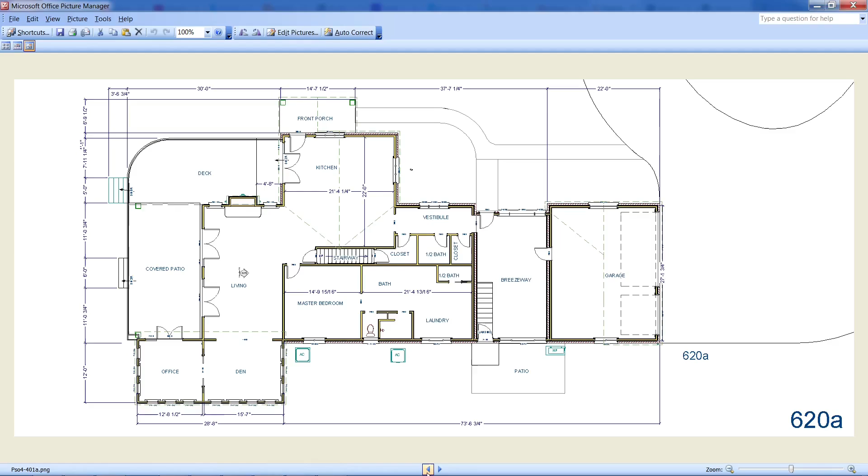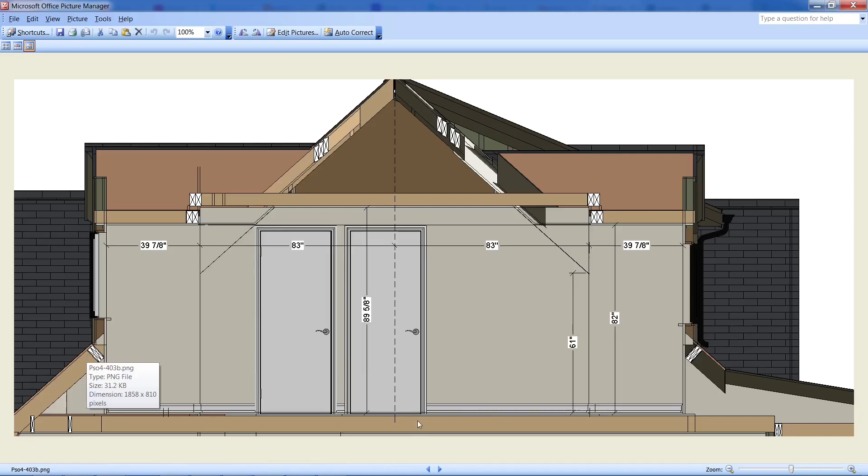I don't know what this 39 7/8 dimension actually is, the depth of those dormers. Those were based on shingle coursing outside, but it should be within a couple inches. Later on, I do have to raise this roof an inch or two to make everything work on the first floor, and you'll see that in a minute. But that's what I ended up with then. It was something that's in agreement with what you had said, the 166 across this dimension here. And so that's what I ended up with on the second floor for now at 623A.

And then I came down to work on this fireplace and went through everything that I'm going to show you in this film. But I did return briefly after I was done to see how the information I had put together would apply to some other fireplaces. Because going in, I just searched 42-inch fireplace and started with really the first result, which, as it turns out, is one of the less elaborate models. It's less big, etc. So you can go larger, because before I made this film, I went back and looked at these, and obviously there are a million manufacturers.

But because I had used a Majestic, the one I used was probably this Royalton. It was called the BE42 in any event, and it's one of the smaller models. All of them were 42-inch, but in terms of the viewing area, height and width, this was one of the smaller ones. It's 42 inches from here to there, the one that I've used for this design. And it requires a little more depth this way than what we had been showing. It requires 21.5 inches on depth. You can go larger than that pretty easily, and we'll be able to accommodate it. That looks pretty simple, so that might be the one I worked with.

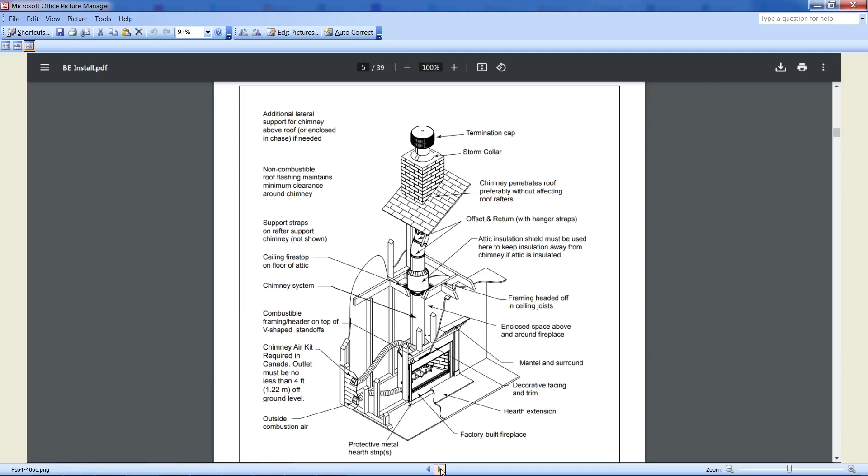But I wanted to see how high I have to make this chimney, and as I suspected, they really want it above the peak of the roof, particularly for where you're located. And there were different things to help with your airflow to make sure this thing will burn the wood. We have 42 out here, but they needed an extra 8 inches because of this bend.

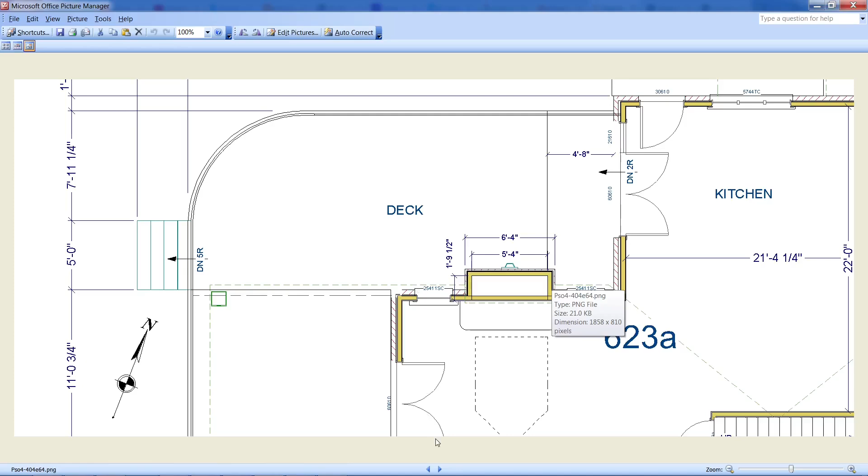And the way they've got this set up, we can't do that because we have a situation on the exterior where we really can't offset one of these walls to the right or the left, either one. So they wanted 8 inches on one side. So I've designed for 8 inches on each side just to keep that symmetrical with this bit here.

Here was a different thing because outside it didn't matter which way it was shifted. For us it does, so I designed that with 64 inches inside, which in terms of this film will show you what a wider than maybe necessary chimney would look like, and at the same time it will be okay probably if you go to a larger fireplace.

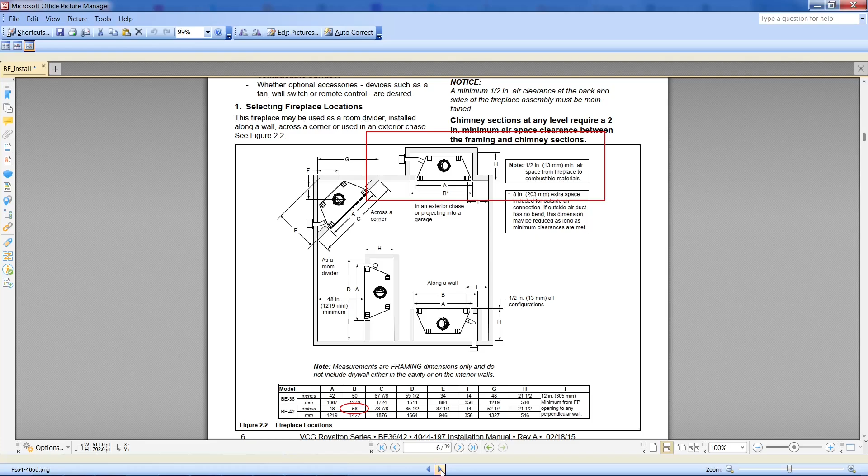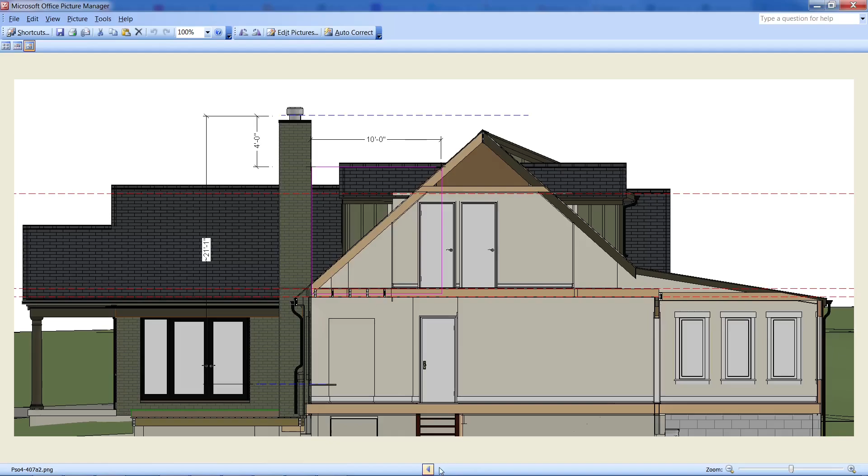As I said, I'll try to be brief, and these were the rules. These are just different caps that I looked at. I kind of like this one for its traditional look, but I just showed a typical termination cap. And I'm showing it here at the minimum code requirement, which is about 21 feet from the bottom of the hearth, and I brought that the extra 2 feet above the peak, and I'm going to work with that regardless, because I want to make sure that fireplace actually burns for you.

And so from out here, that was that code minimum height on the chimney, and that's bringing it up above the peak. But the next thing I did was update this exterior according to what you said. All of these different levels come up to 0 like this. So everything up here is actually level with the inside. This porch and that one and this one. That's all level at 0, level with the subfloor, with the thresholds coming out on top of those.

And then from this porch, I have it sloping down at 1/4 inch per foot here, and it has some sort of slight slope upward here. And I was a little concerned about drainage. What also happens in this shift, besides raising that up, is the round columns go away and we go to a simple square column. Those round columns were 8 inches at the top, and I'm showing these finished at 7 1/4 each. So those can be done with a 1x8, if that's just cedar wrapped or MiraTEC or something like this.

Didn't cover this in that earlier film, but notice these windows over here in that breezeway. I changed that to a big picture window with flanking casement windows, and you might want to shift that. I think it wouldn't hurt to have this picture window a little more narrow and these flankers a little wider, but that's up to you. And through these other 3 rooms I'm showing groups of 3 windows with the middle one fixed, and you can have all of these opening to the west or to the north or whatever, if you like.

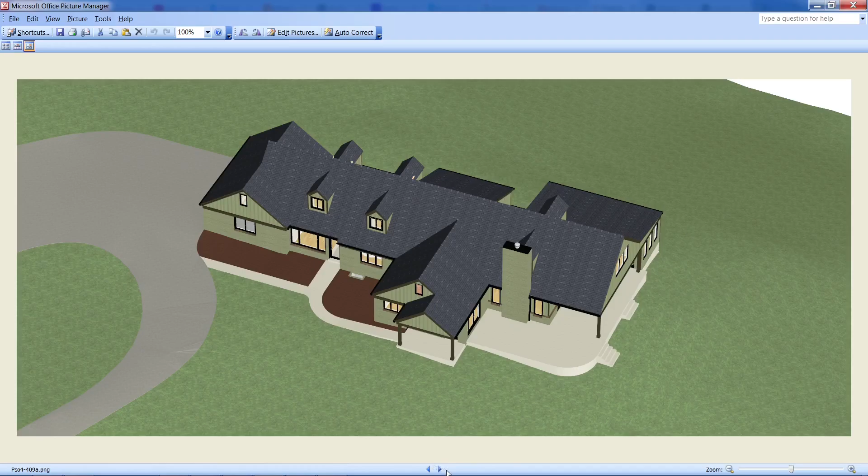When you look at this, I will come back to these sidewalks. These are not in their finished form, but when I looked at this corner here, with all of this living space out here, and you may well disagree, so ignoring everything up here, because that one hadn't been worked on yet. This was when I just finished this and the columns.

And it seemed to me that, particularly with this curve down here, because I don't think a square joint would work at that location. And then possibly some more landscape magic brings that up where it's just one step down, but there's enough space here, you could be flexible enough for 2 or 3 risers down if you want something that rigid, made of concrete, etc. At least it would stay there.

But that's what I'm showing for the moment, and tell me if that should be taken out. And all of these, this concrete actually comes into here, and there's a threshold, like you can see under here. So next, though, I adjusted these pathways up here a little bit further.

And added this one I have sloping down 1/4 inch per foot to about here, and this I have sloping down less than that. And this curve actually slopes as well, slopes up, according to my best adjusted guesstimate of where these elevations are. But this is the actual plan that I'm showing right now, this 84-inch curve, 84-inch radius here, and I believe this is a 44-inch radius here.

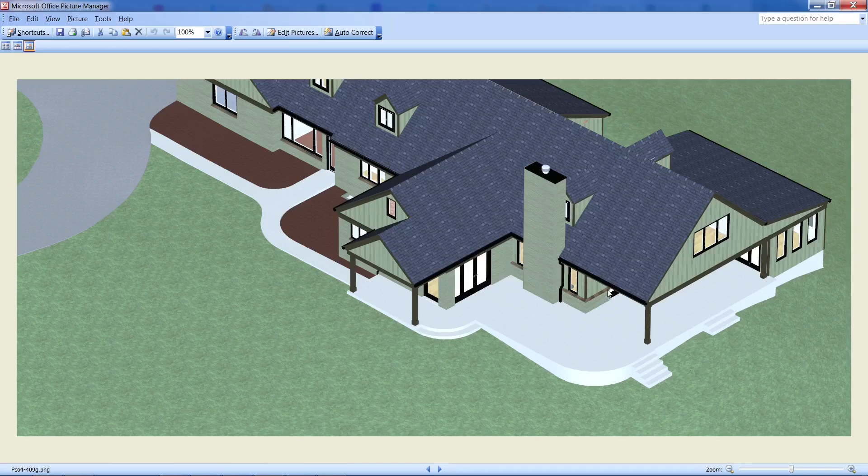And then I thought this was a lot of busyness going on in through here, and so I made those windows a little shorter, and you can see here, this is where this roof comes up an inch as well because of the situation I ran into a little later in the film. Those windows come up and this sill just becomes continuous with the windowsill, whether they're narrow or wider. And we'll be covering a little bit of that later in the film as well.

Once I had put that in for the moment, I did work on these sidewalks, and it looked to me like this point here was maybe a couple inches below zero. And we know that the front porch wants to be at zero, and everything over there wants to be at zero. And it looks like in this diagram, this was almost at zero, it's almost already level. So you could actually sink a level sidewalk all the way into the ground.

And I didn't show that because I was a little worried about drainage back, but obviously drainage and all that could be handled back here in the corner. But I did not show a really raised thing where you build out the landscape in front of that as well. But that can be easily done. What I ended up showing is shaped like this.

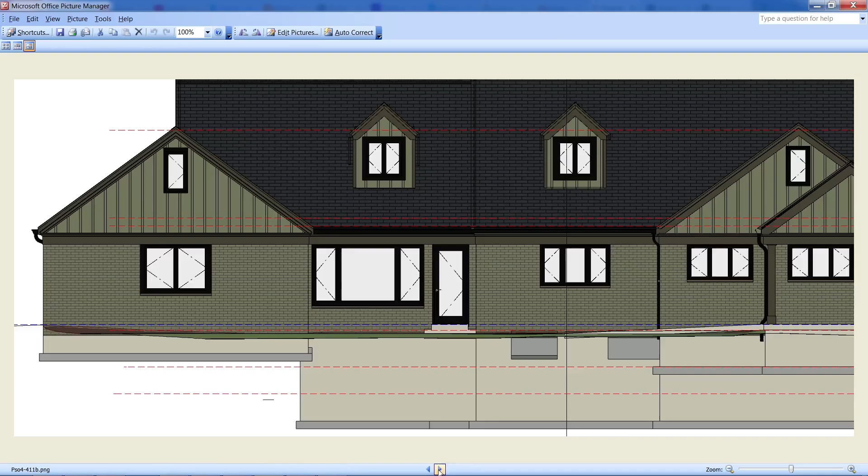This was the shape, and that's actually 88 inch, and this goes on to become 44, and these are both 88 inch radiuses here. But you come more or less level across here and slope up all the way to this door at about 1/10 inch per foot. You slope down to here and then back up at 1/4 inch per foot. But I did not get a chance to show that just as all one platform all the way across there. I had it kind of following the land a little.

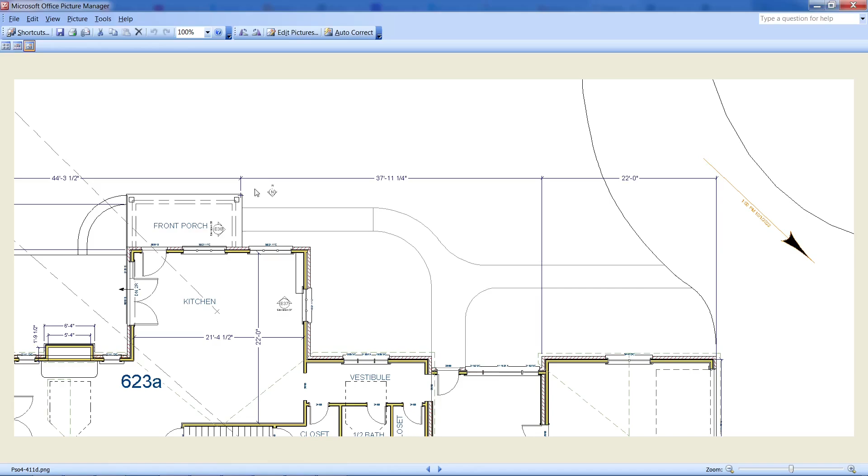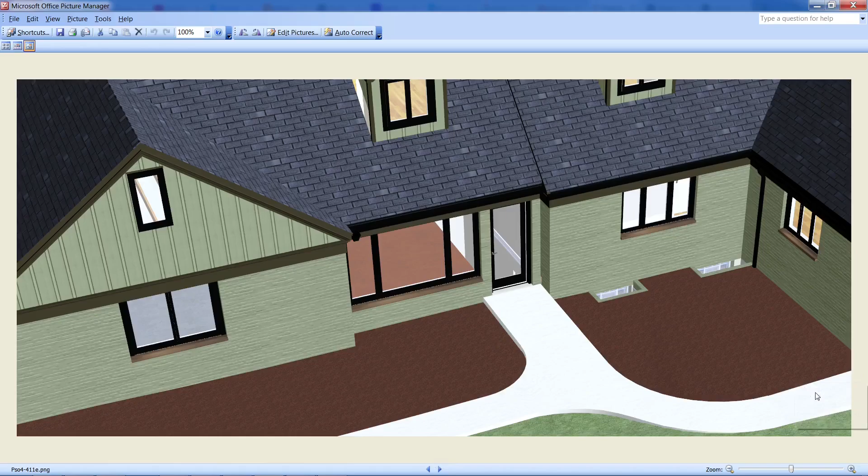And that was because initially I was a little worried about drainage, but as I said, I really don't think it's going to be a problem. This is pretty much where your grade is right now, up to the tops of those window wells that have been built on top of a couple courses of brick. And as you can see, this is sloping down from the front porch and then back up to this porch here. The slope is slow. It's just a very low slope in the first place.

And so if you bring your grade up to the bottom of this 6-inch thick slab, 6 inches at the edges anyway, and even if you keep this grade level across here with what it is at that corner, bring that across level, you can see this becomes the low point back here. And I don't know that much about landscaping. Maybe that can all just be filled in however you like with the appropriate drainage, particularly now that we're handling these downspouts.

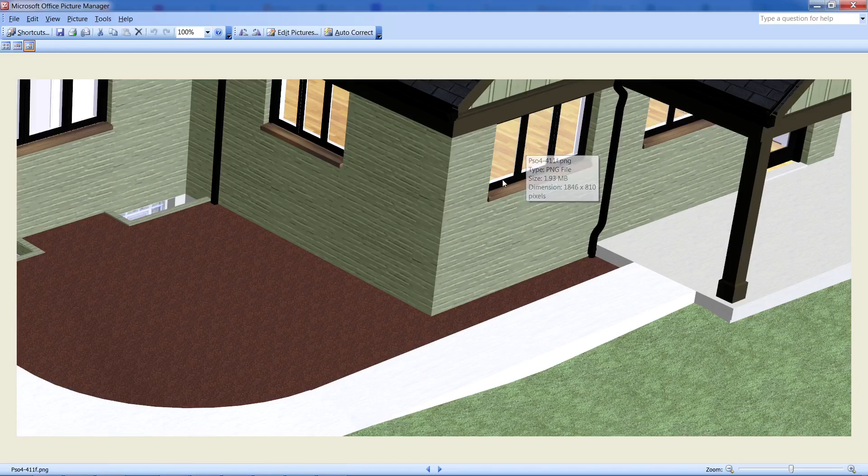And this photo doesn't show enough, but I'll get rid of this clunkiness and put it out on the face of this column here, because I think even though we have this break with the roof, it's better if this wall is just one uninterrupted surface across. That's my feeling.

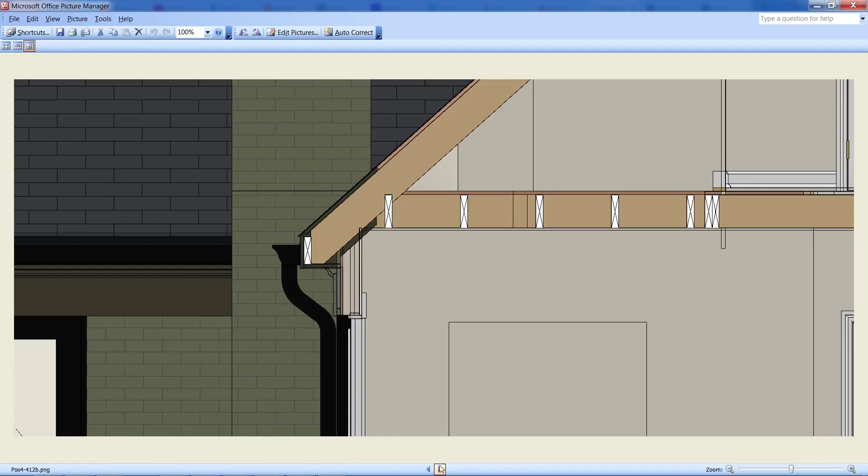And this was where I had to raise that roof a little bit inside, or raise the planes of the roof, because, and I don't know exactly how this is framed here, I think there is probably a plate here that this comes down on, and maybe they just notched that out far enough that I could have left that roof down, but I did end up moving it up an inch, which is insignificant, but that's what I had to do to make it agree with what I was seeing.

And then I began to look at this area here and some of this other stuff through this next section, I believe. And so right now I'm showing these 2153. So in this photo, these are the ones that come down and are part of that continuous sill around here.

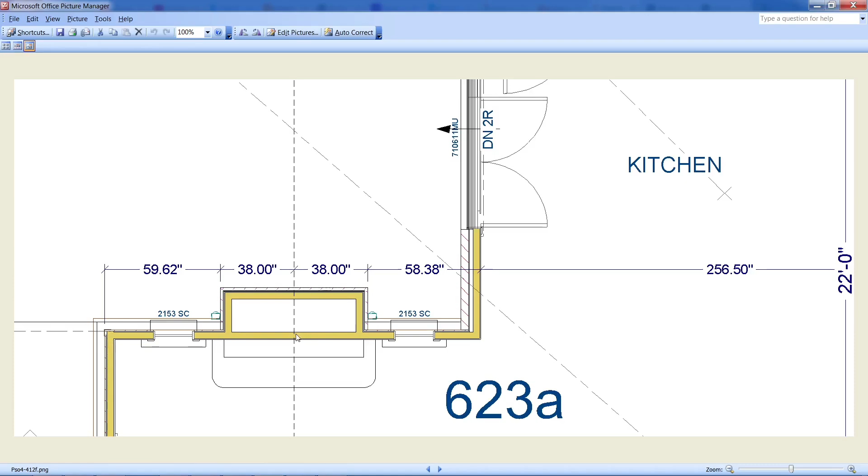So 21 wide and 53, and those are in inches. And there's about 4 feet. You can see this is going over to the inside. There's 4 feet here, and there's 5 feet from here over to the corner of these pony walls. But we can't shift this unit in here. This has to continue. For one thing, it has to line up with the dormer above.

But coming inside then, and here's why I don't think we can make that top of that chimney any more narrow, and that's probably not going to be part of the design, but nothing's been done up there yet. But looking inside then at these two areas here, I guess first at the kitchen, at the height of these kitchen windows.

This is the countertop. I'm showing a countertop level here, and this is the standard 4-inch backsplash. A lot of people aren't even using backsplashes these days, and they just run their tile all the way down to the counter. And sometimes they run the tile all the way up. I don't know what your plan is with this, but whatever it is, these windows have to be accounted for and how those are going to be integrated into the countertop and the backsplash.

Here they are with a simple sill and no apron underneath like these here have, and are taller. And then I pull them up some because they're going to require you to have some outlets along here, and if we have them at Pella's next size lower, that's going to be a tight squeeze to get outlets in there, because I'm already a little concerned that we're going to be able to get all these door heads and window heads aligned and integrated with the frieze board outside. But that's what I showed in the kitchen, and that's things to think about.

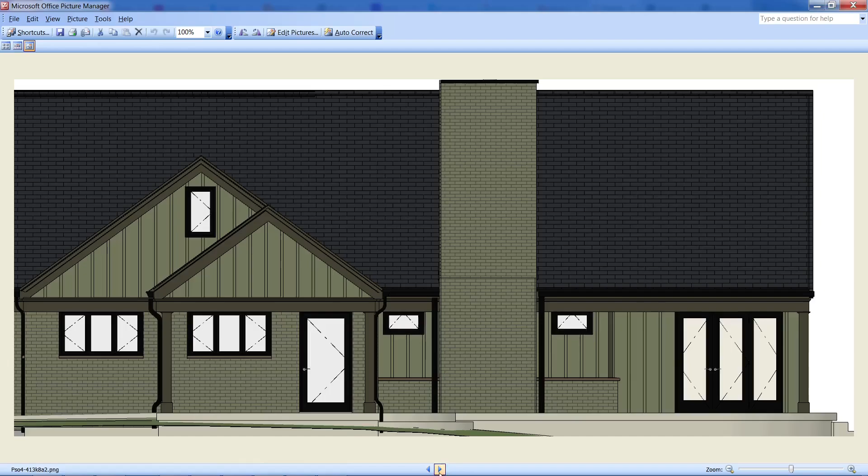And maybe these awning windows work better. I went down to 21 and went down all the way to 17. So I would have pushed them out a little like this. That may or may not be something you had in mind. And I like that or this actually at the end of the day.

But you could see that if you want a bigger fire, you could bring this down, this hearth thing. A lot of times these are only 8 inches off the floor, and I'm just showing this as painted brick, but you have to describe what this base is going to be for that hearth. But you could bring that down another 10 inches and do some gaining either for the fireplace or for the

TV or something like that, if you didn't want people to be able to sit on that without having to bend their knees. Otherwise, maybe it's brought down to 8 inches. Even 12 would give you some more room. And I don't know how that impacts the balance of these windows on this wall.

And additionally, and it's not covered in this film, and it's still yet to be looked at with regard to that wall, you guys haven't even said, but there's going to be some sort of fireproof material, and perhaps this wall, particularly if you want a little bigger firebox, maybe this wall projects into this room some to provide that deeper firebox, and maybe to provide a separation for you to wrap this whole thing in stone or something like

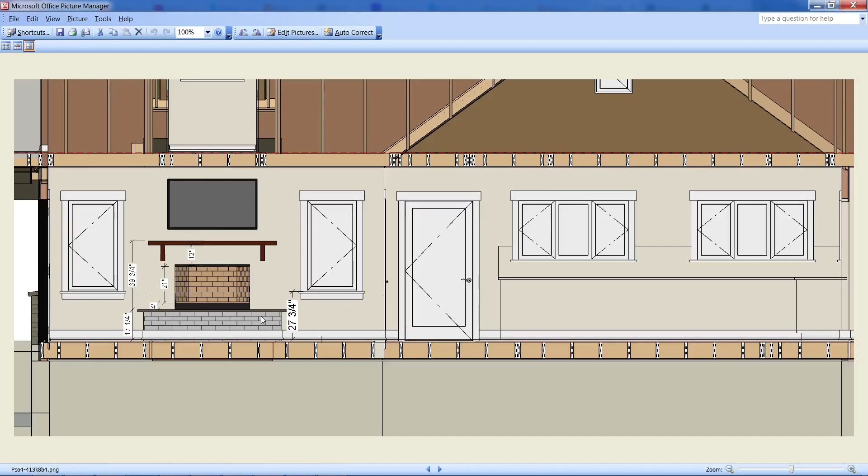this. But describe that to me along with product if you would like, and I would develop that a little bit more. My guess is you want a little bigger firebox, so that means it's going to have to be pushed in maybe and out. Either way, let me know and it can be done, but this was a review of that wall. And I probably prefer these larger windows from out here, to be honest. But I think that is it.

That is it for this film, and the reason I stopped is because I knew once I began to look at how we were going to do this, that rear roof structure is not actually going to be workable as I'm showing it with the 2/12 pitch. The shed roof would work, but you'd be into either an unwarranted shingle laid on 1/12 pitch or some other membrane type roofing on that back pitch. But I'll be exploring a variety of things, and I'm eager to do that. So that's why I actually brought this film to a close here.

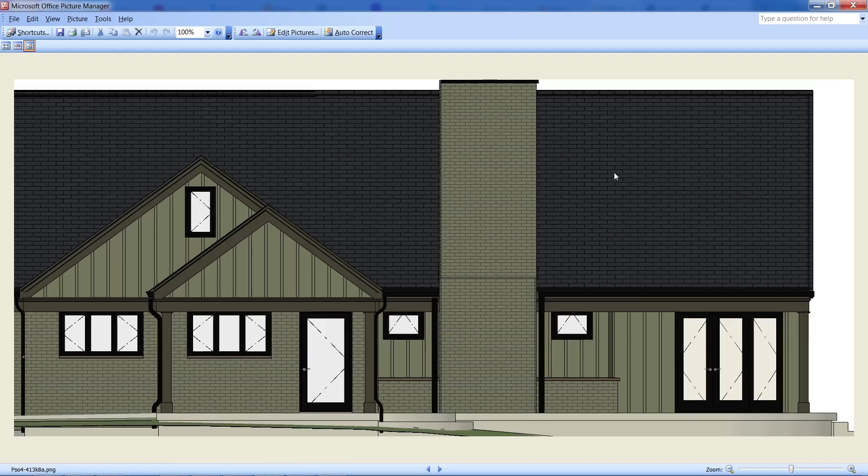Okay, actually, not to stretch things out, but I did a few things from this other angle that seemed like they were appropriate for this film, dealing with the dormers over there. And then I developed 2 different alternatives for dealing with these dormers, because all this aluminum is coming off and this crown mold is going to come off. Presumably this crown mold is coming off completely over the whole building.

So the next thing I did, and I'll just run through these quickly, was develop 2 alternatives for this little cornice treatment here that I think will work with what you have there. And this is what they amount to, really. This is about 5.5 inches of exposure here. This is a 1x4. So with this alternative, it uses this 1.5 inch high T-style drip edge down the gable and back the eave.

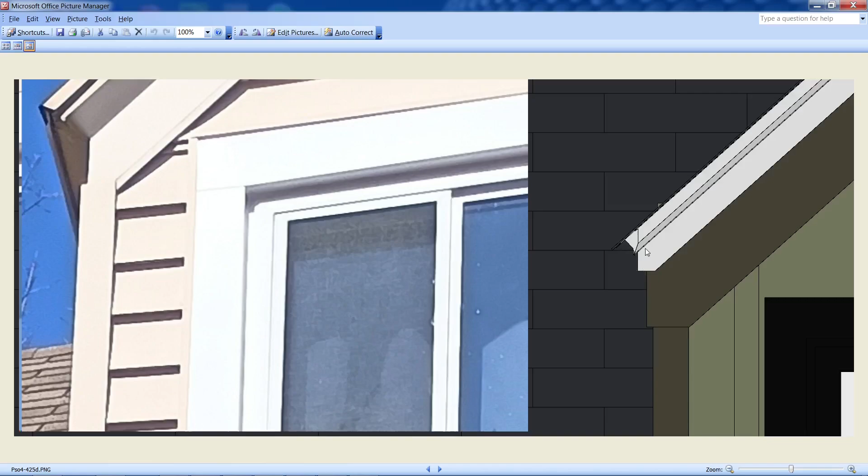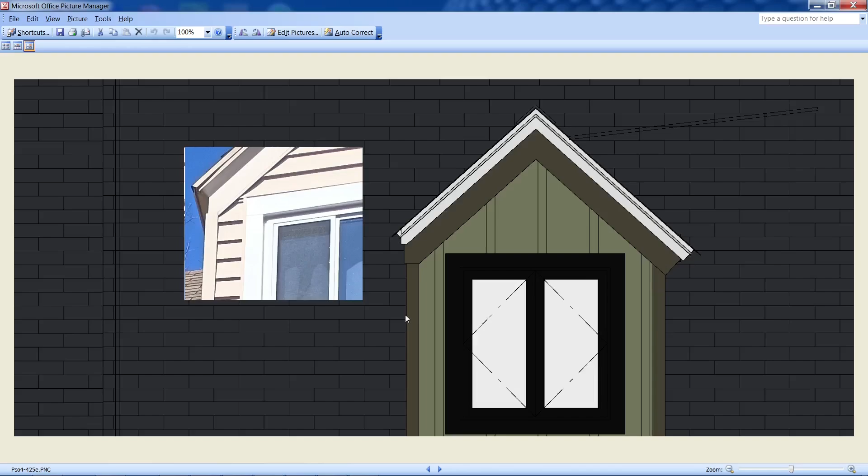And that 1x4 that comes down the gable also runs back the eave, as does this 5.5 inch piece. So all those pieces run back the eave. And the other side, same T-style drip edge all the way around, same thing, except this is run on a square cut instead of a plumb cut. So that was just 2 different alternatives that I developed for those 2 dormers that I thought could work.

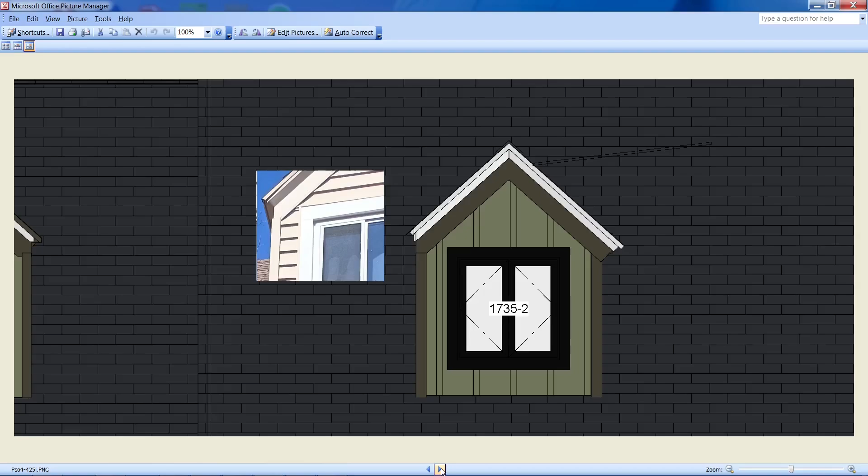Then those corner boards are widened out to 3.5 from whatever they are now, which I think is closer to 3. And the window is adjusted to actually Pella windows, which is going to be 17 wide by 35 high. The actual frame itself without the casing, that standard Pella.

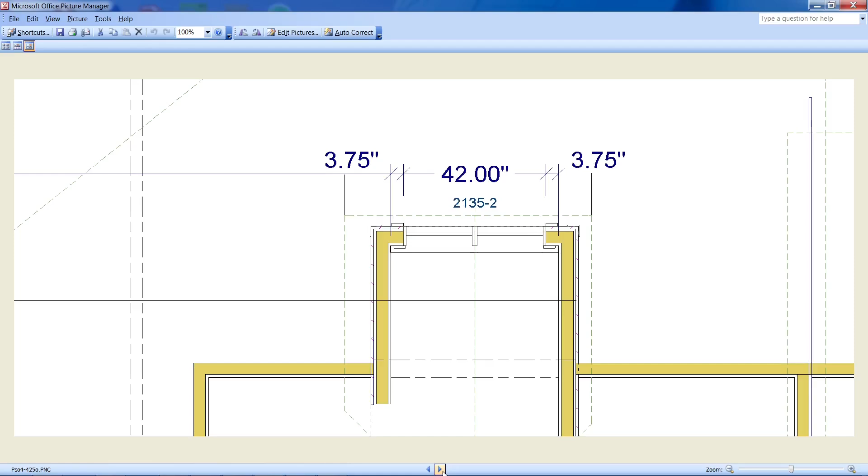And it looked to me like there might be room in there. I don't know this because I don't know what this dimension is exactly. But it looked like a person could entertain using a wider window up there, but I didn't think that was going to help us in any real way, and whether it was doable or not.

So I reverted to the standard Pella 17-inch wide unit, 17 by 17, 34 wide. And here are the two cornice treatments that I wanted to consider. And this one's perhaps just a little simpler to be done. I don't know. This is that with that Pella 1735 twin unit, and then I went to a 5.5-inch lintel style head on that with a drip edge,

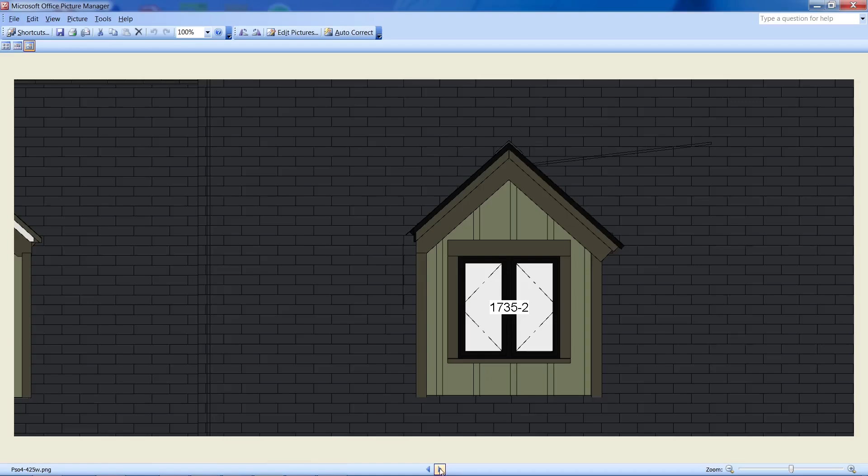and possibly just the 1.5-inch sill down here, and that would have to be wrapped with aluminum to match whatever this paint is, or something close to that, because it didn't really look good when I did that sill in black like the window, which would be a more standard aluminum color. But it might be possible also, if you wanted to create this higher look, depending on what the dimensions actually bear out there, to go to that taller Pella window size 1741 twin unit.

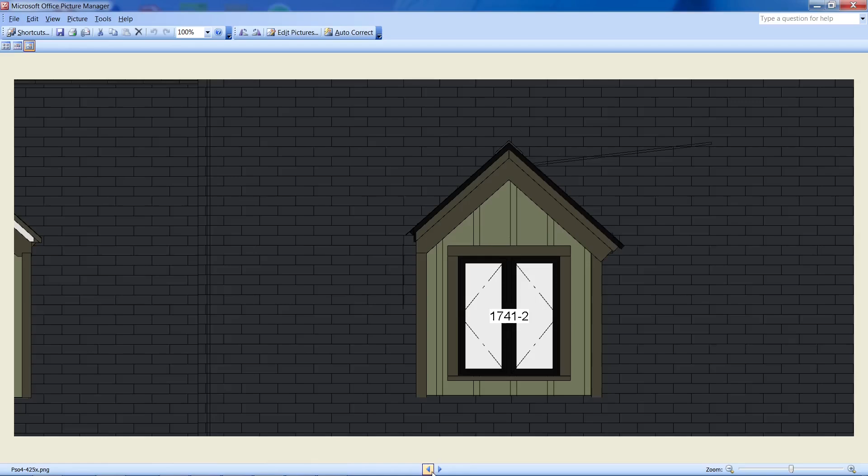So when I adjust the cornices where they both are the same, and then all of this crown molding here and here and this stuff along the bottom was all replaced with straight 1x4. So that's what I ended up with after working with that side for a little while. This is where this side is now. I left those windows short. These are both Pella size units.

Oh, the other thing that happened, and this shows a few of these different things that happened over here. One of the things I did was make sure I adjusted the rest of these windows to actual Pella standard sizes. And I started with that breezeway, which apparently is going to have to be a little shorter. And what would probably happen is that that sill would stay lower and a frame expander would be put on the bottom of this window here.

And then I made this sidewalk level, and this landscape belies that. But I made this level, well, it slopes up 1.5 inches or so to here, and believe it or not, it doesn't look that way from here. There's a little glitch right here, but this is all level across here. The next thing is those changes where all this stuff was changed to 1x4 at all of these various corners. I missed some here, but that's picked up in a minute, where all that crown mold goes away, and that just becomes the 1x.

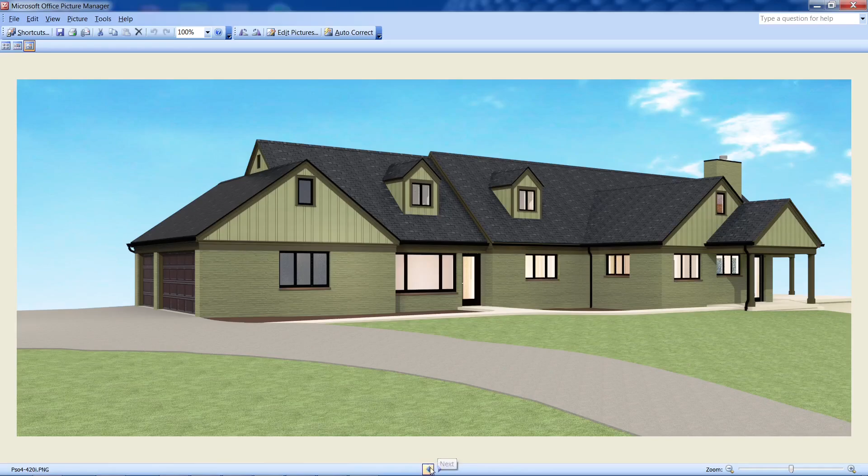The square cut, and I had shied away from that square cut because at first, one of the reasons I wasn't even going to show it was we're not going to be able to create that. I suppose a person could if they were inclined to, but that would only happen at these dormers. You wouldn't be able to create that at these other ones without a lot of headache. But that's the change at the dormers there. And I can go with either one of those as well. I almost kind of prefer this, giving them a little bit more power, but I don't know with the tall windows. So that's what I ended up with on that facade there.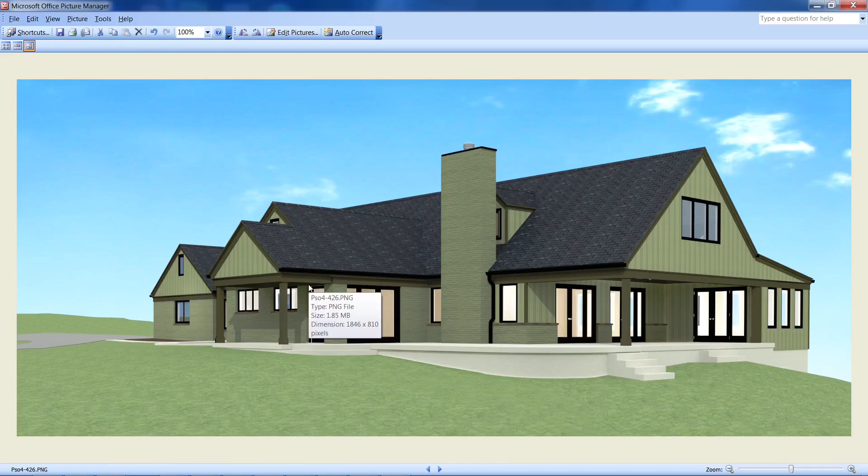And then the only other thing I did for this part of the film, and I promised this time around, is from this other angle, where the only thing I intended to do was make an adjustment here. This was earlier and I had this shifted right here. You can see the shift instead of being smooth like this one that just comes back.

So that was the only thing I intended to do on this end, just pull that out, but you can see the new 1x everywhere. But then that led to, I mentioned earlier that this room was not going to be 8'4", and when I looked at a section view it was even worse than I thought. So at least for this film I'm going to take a little look at this rear structure and see what I can do with this roof and accomplishing a higher ceiling in here.

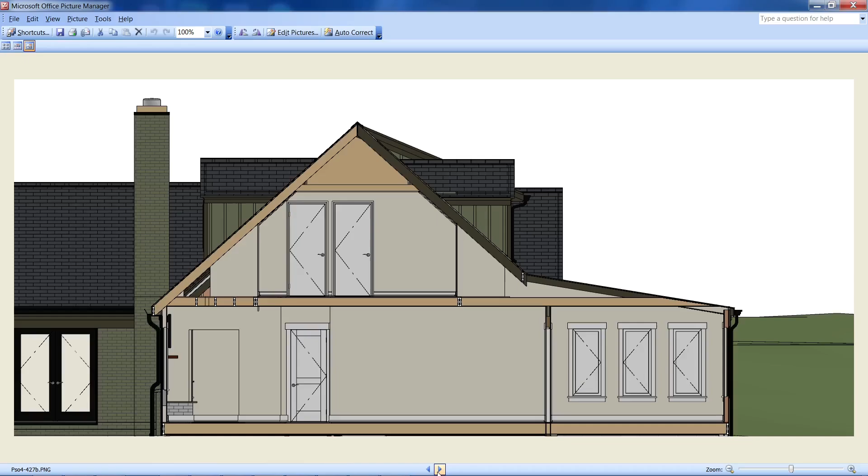And so looking at a section through it, this was how bad it was, where we actually had roof slope down here in the room even when we built that room at 8'1". So I wanted to raise the room up right away because I feel like that should probably be the same height as the rest of the rooms on that floor, just so it doesn't look and feel too much like just an add-on at the back.

And that left me with this, and I knew at that point probably if we use this shed roof arrangement, the insulation in here would have to become a spray closed cell foam, to get that up to the R38 over the wall at least, and they want 48 or 49 over the whole thing. So maybe that whole thing is just sprayed, because otherwise with this shed roof we're not going to be able to accomplish a 2/12 pitch. I was able to raise it up though.

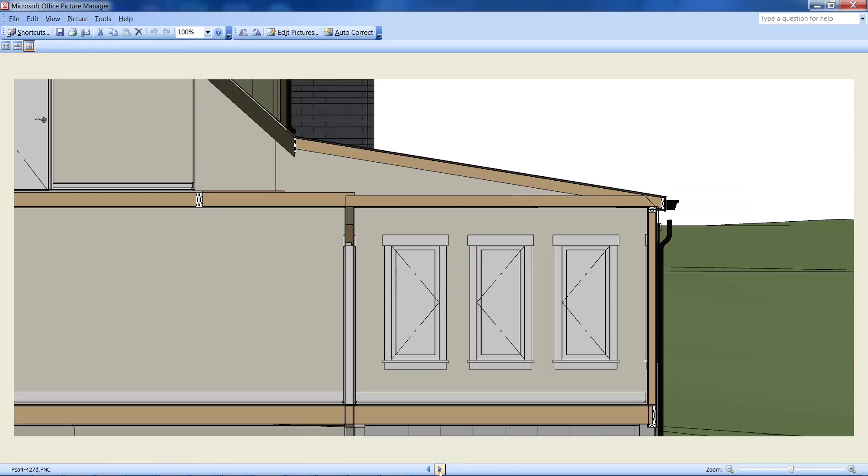With that precept of spray foam insulation, we don't need insulation baffles and high insulation here, because this is only a 2x6 ceiling joist running across here. And obviously that helped the inside, and I think that has to be the starting point at that rear, to have that the same height as everything else. And you can see right here how that lifts us up well off of our frieze from around the rest of the house. And this frieze board here, this lifts us substantially up off of that.

And so I don't know whether that goes away and something else is done here or an extra piece is added, but I think we might have to at least take a look at something like this, just because I already made some photos of that front with that front dormer extended to the back side of the chimney. It doesn't look very good, and I'll show you it eventually. And I don't think adding another same size dormer out there on the left will help, but I will show that to you, because I still don't think this low slope roof back here is ideal. Just from a whole house perspective, I think this would be better, even if this is just empty sided space here with no window or access from the room.

But my offhand feeling is that whether this is trussed or stick built, there would be a window back here from that same room. Oh, one thing to consider also is I have these windows going every which way in terms of which way they open for venting. So kind of figure that out in your head, which way you want those to vent. Now I have them all opening where the first opening is at the west. And I transposed that out here, and we wouldn't do something like that out here.

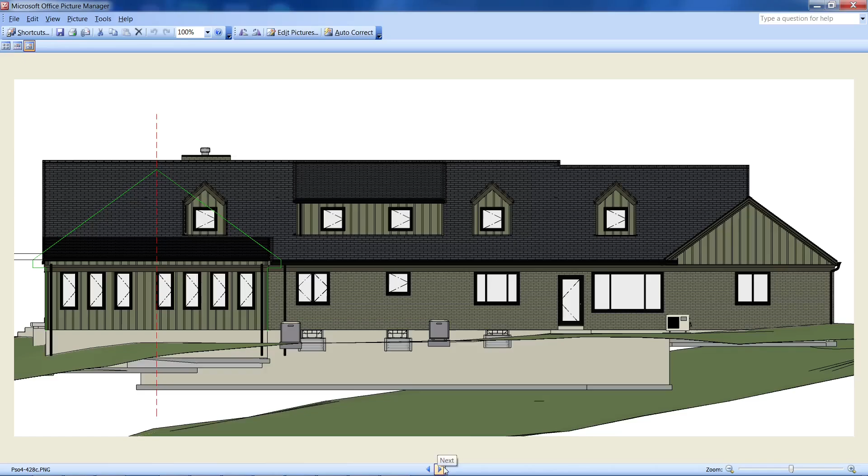But as I said, that dormer behind, I'm not sure whether both of those dormers might have to go, which compromises that space substantially inside. So that's another consideration. But out here, we might be able to hide the dormer with a structure, maybe something like this, where it kind of integrates with the dormer. I don't know. But this time I can promise you, and it's not going to be a lie, that will be explored in the next section, which won't be very long at all, because I'm interested to see how that could be developed.

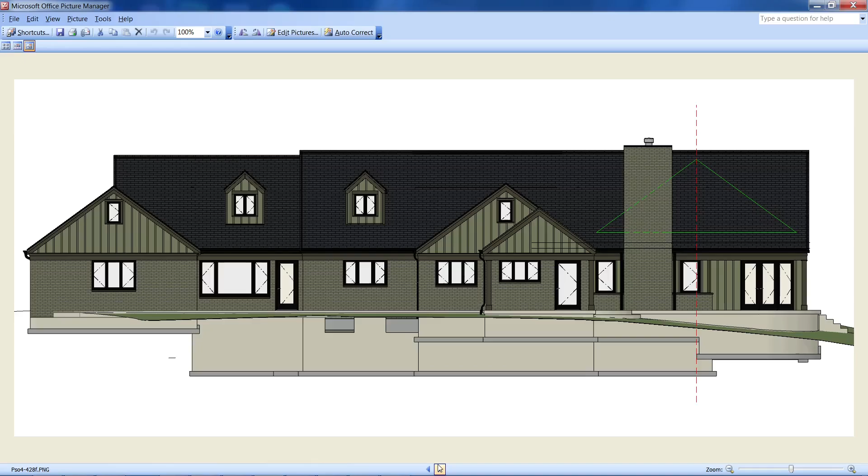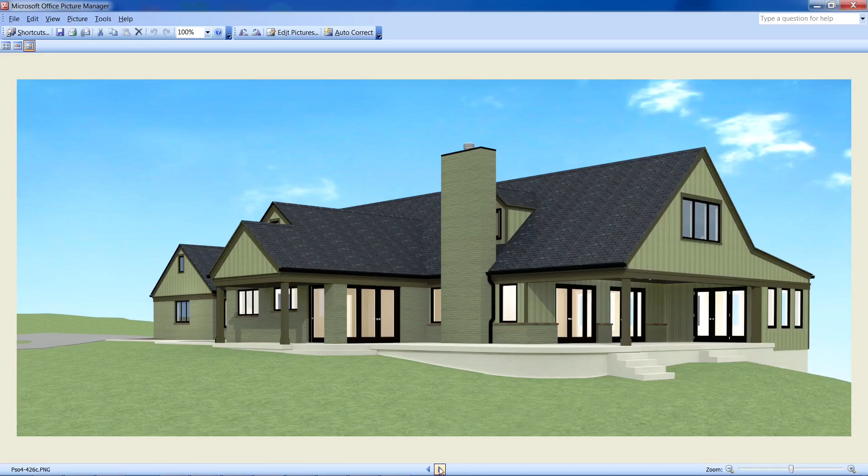Nevertheless, here is the result of just getting that to a 2/12 and that room back there to 8'4", like the rest of the house, from this angle here, and it adds casing and a window head to this window here. And the way that's kept at 2/12, it's just pushed really close to that dormer. As you see, it's all metal. It'd be flashing running right up to the bottom of the dormer. But that does maintain a 2/12 pitch at that rear slope. So that is it for now.